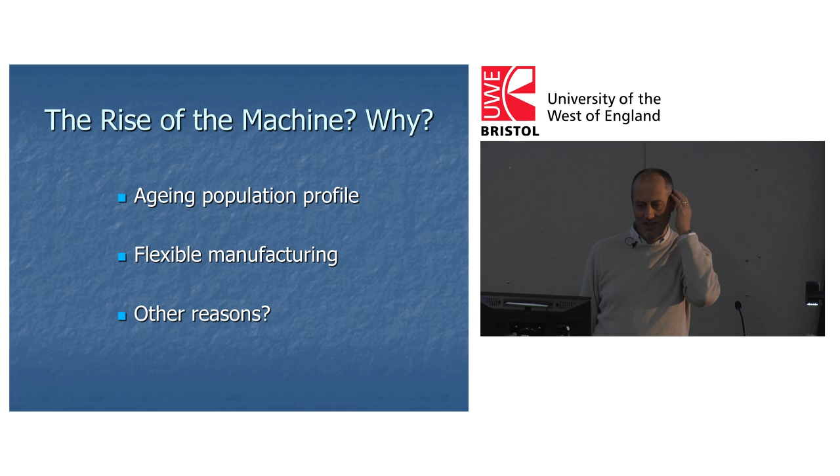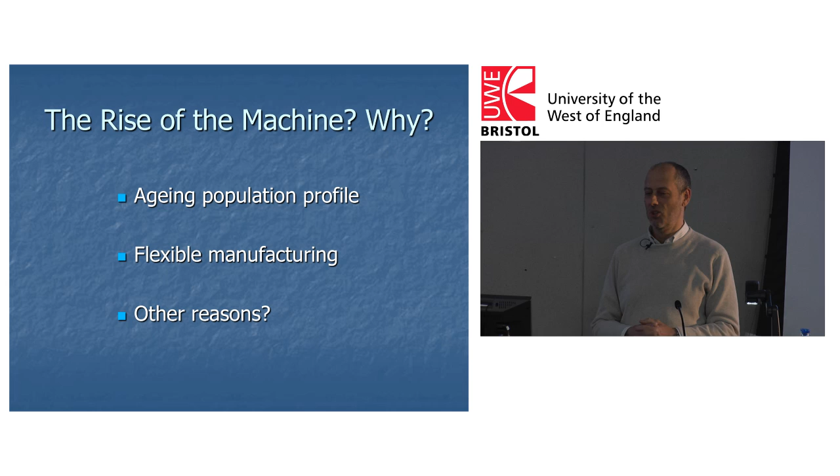I've put other reasons in here, though I'm reluctant to go off into fantasy land, because robotics is one of those areas where there's a kind of fantasy in our heads. There's some fascination coming from somewhere I couldn't exactly define, for us to create something. You could say it comes from monotheistic religions, the idea of creating something in your own image, but I don't want to go there in this talk. There's definitely a fascination with building something - if we can't meet an alien intelligence, we might build one. I'm not a philosopher, but you can see it from the film industry and science fiction books that we have some fascination with this kind of thing.

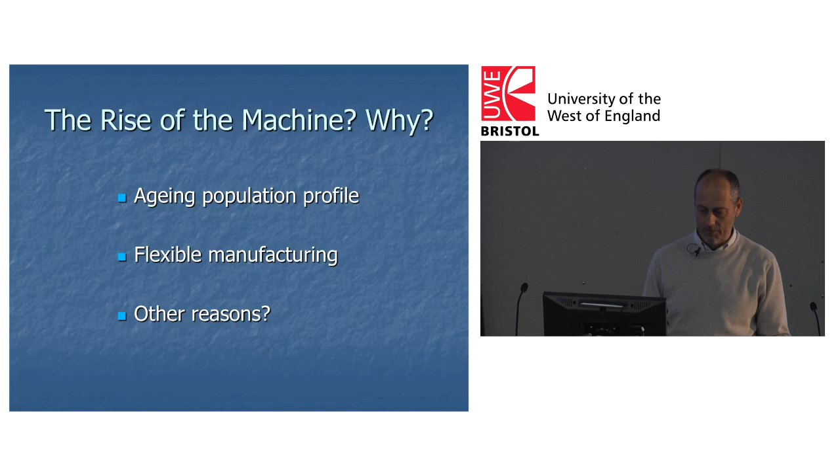What I mostly want to do is romp around talking about the key challenges of what needs to be done to knock down the walls between robots in their manufacturing cells and us, to have them amongst us being useful. There are a whole pile of issues here, and I only have time to mention some of them briefly since this isn't a long talk.

Energy autonomy is number one in so many ways, but we don't have time to talk about it in that depth. Some of these I'll talk about in a bit more detail. Let me just run down through them quickly.

Energy autonomy, I think, is the elephant in the room. If you imagine a robot other than one you can plug into a wall socket, how will it keep going for more than 20 minutes before its batteries or other power source goes flat and runs down? No idea - we haven't answered that question.

We are doing some work in our lab on energy autonomy, trying to create, in some ways, a kind of artificial intestines and guts to consume biomass and produce energy, but I haven't got time to talk about that here - that's another talk. I'll just mention it and carry on.

It's not solved. If you look at the Terminator movies, Arnold Schwarzenegger has not one but two nuclear reactors or something similar in his chest - that's not practical, is it? Could you have an internal combustion engine? I don't think so, not in your home - a two-stroke 50cc engine whirring away isn't going to work. The energy density just isn't there in batteries. It hasn't been, it isn't there, and it isn't going to be there in the foreseeable future. So how are we going to do this? Don't know - let's just leave that one.

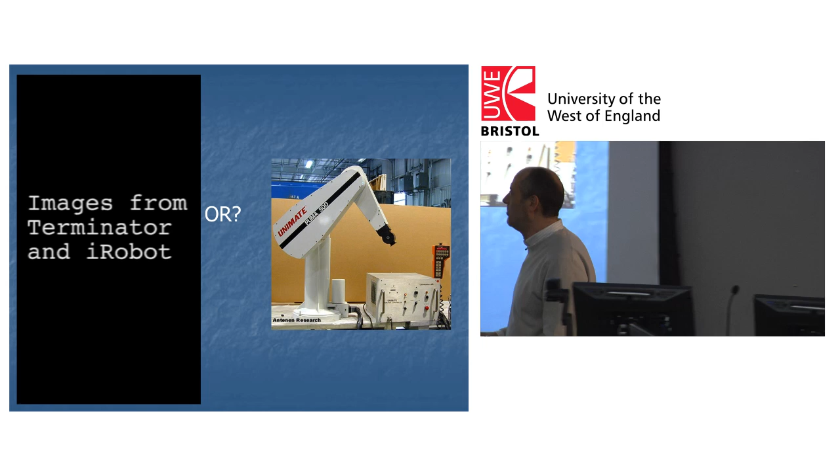Part of it's to do with the media—we almost believe that robots are these things. I know we know they're not, but we kind of have this image in our heads that a robot could be this thing. But we also kind of think, well, really, a robot is this thing.

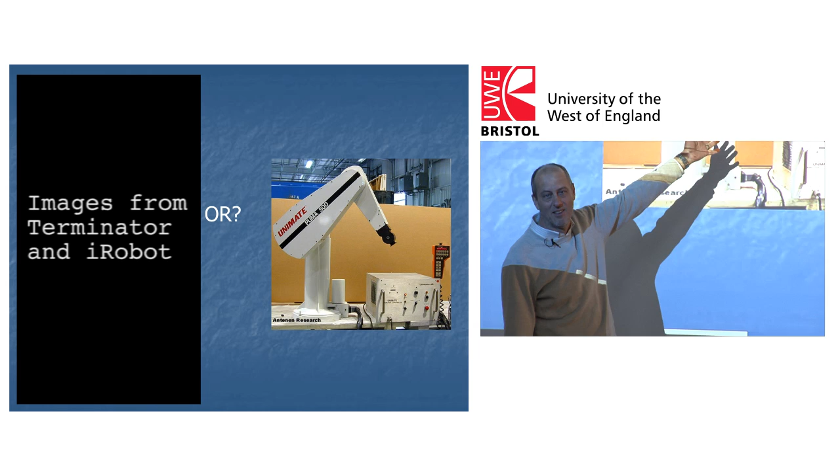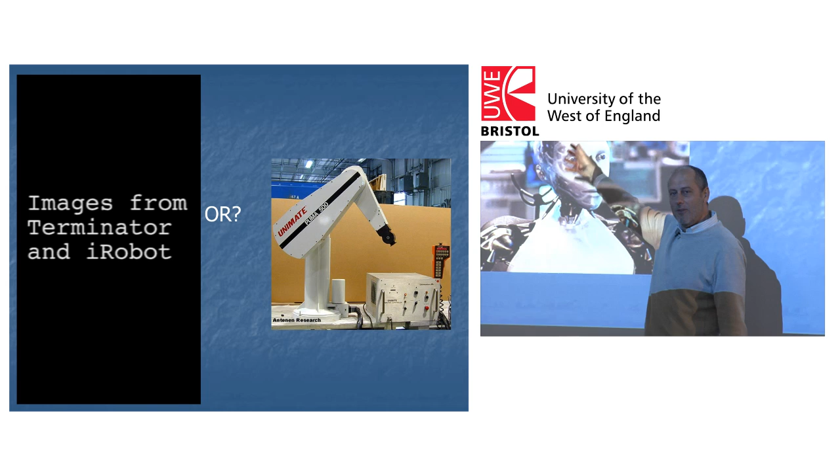This, by the way, some of us will know, is a very old manufacturing robot, one of the first manufacturing robots. So we have this duality in our heads, and it means that when we're doing research trying to actually move from this world into this world, we have to be very careful as robotics researchers about what we really claim we can actually do.

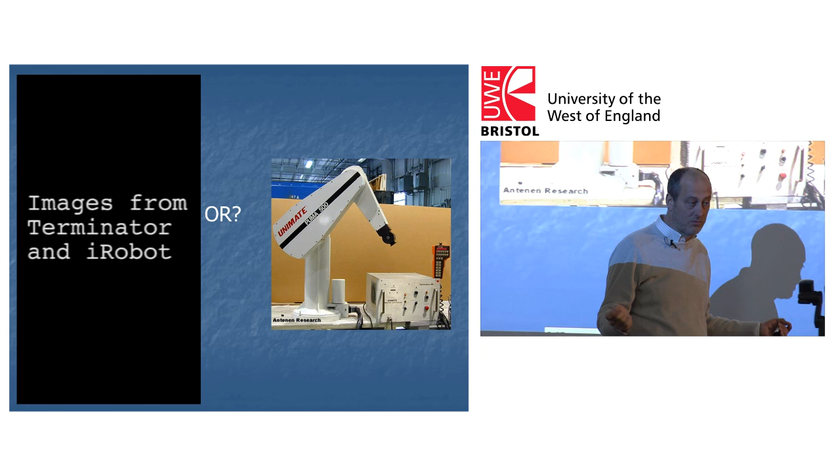It's a very hyped subject, robotics. It gets a lot of media attention, which is good. We had David Willetts, whatever he is currently, around our lab last week.

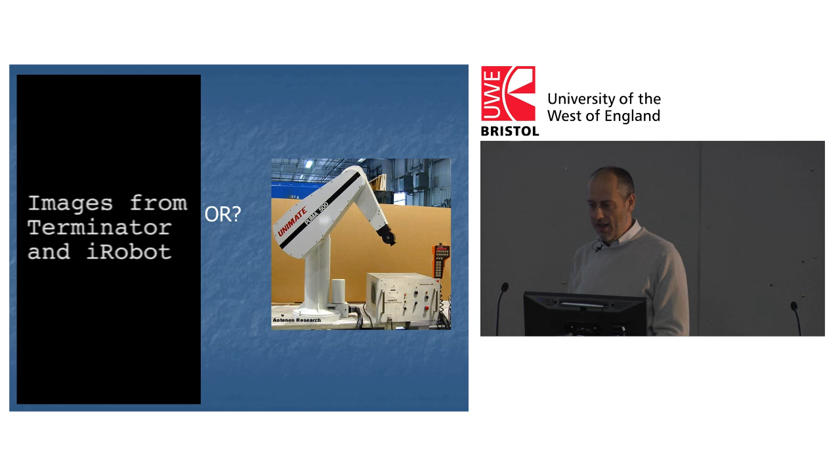One of the ministers, what is he minister of? I can't remember what he's minister of currently. Universities, the universities minister, there we are. So he likes coming there, and he enjoyed it. But I'm sure he would only say mature things about the place. It's clearly a subject where you have to be careful about what you say.

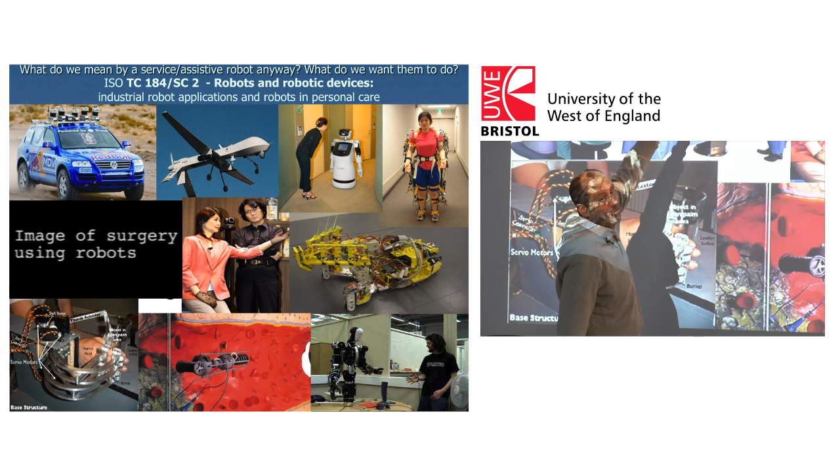What do we mean by a robot anyway? There's all sorts of things. This is clearly a robot, one of the humanoid robots from our lab. There's another robot with whiskers on it, and one meant to show something travelling down a blood vessel - we're just starting research in this area. Is that a robot? Yes, probably. There's a robot surgery machine - is that a robot? Probably. There's a car that can drive itself around - is that a robot? Maybe. So there's no hard rules here. We seem to know intuitively whether something's a robot or not, but we don't really know where the hard boundaries are.

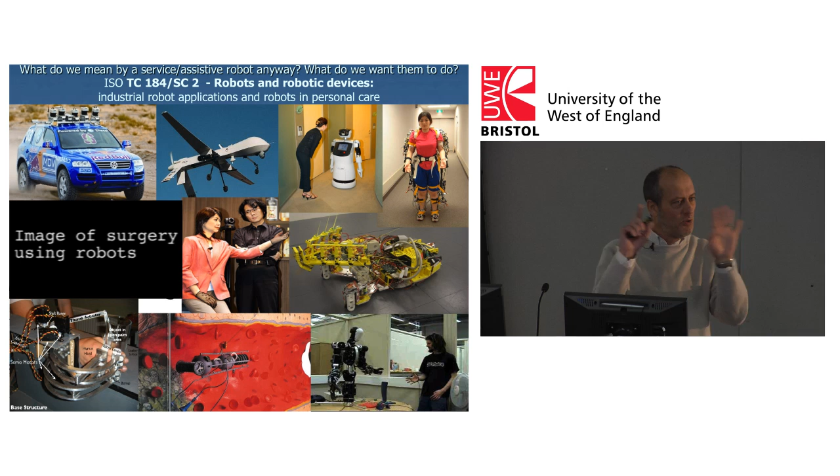What should robots look like, anyway? Well, here's a robot - this is us playing around with robot heads.

Hi, I'm Danny Bozzo, an MSc student in Mechanical Engineering at University of Bristol, doing a thesis at Bristol Robotics Lab. I'd like to show you one of the robots we're working on here, a robot with what we call a hybrid face, one that combines real physical structure with digital 3D animation. Subtle movements and random blinking help add to the realism of the face, and the robot's mouth synchronizes with an incoming audio stream dynamically in real time to control the mouth movements. We're exploring facial expressions as one means of nonverbal communication between humans and robots.

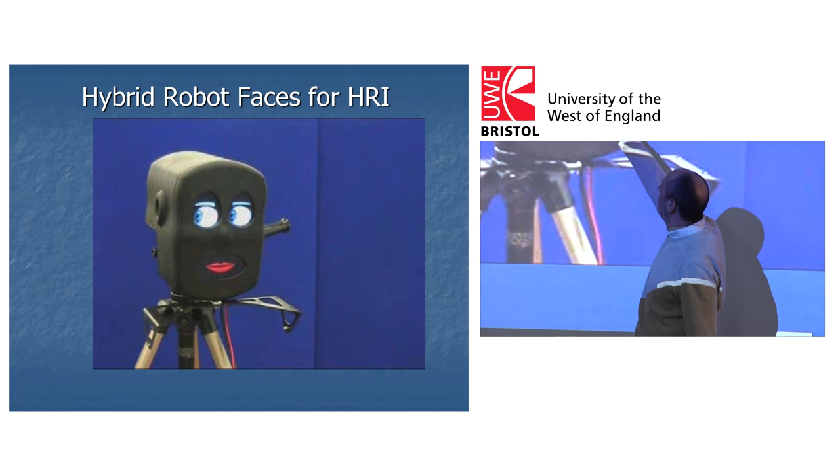And what we've done is link the speech movements of the mouth and the eyes, paying attention to things as they moved around on the screen, so it could make you think it's paying attention and form certain expressions. One thing to note is that this head doesn't really look that much like a human head - that one, however, does.

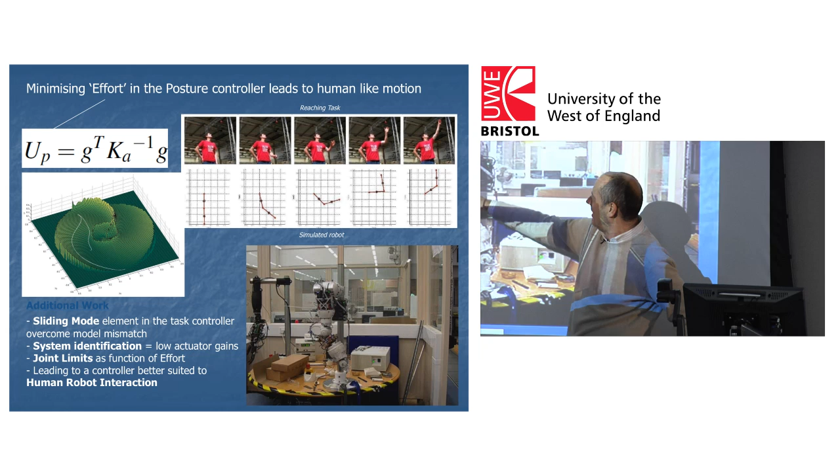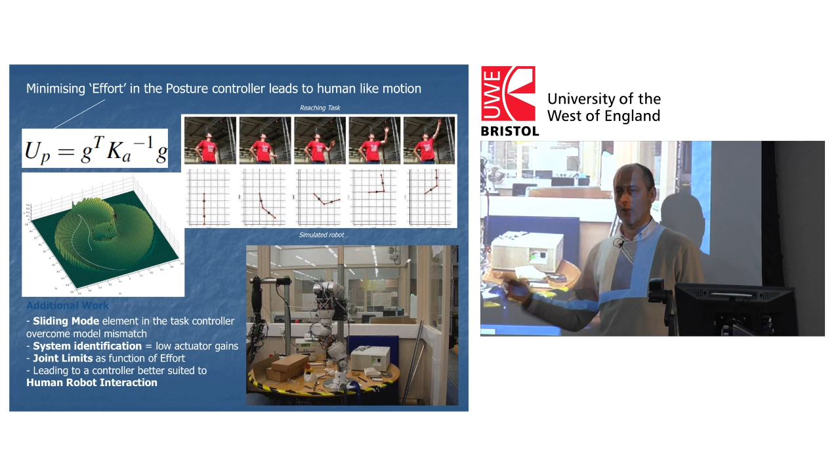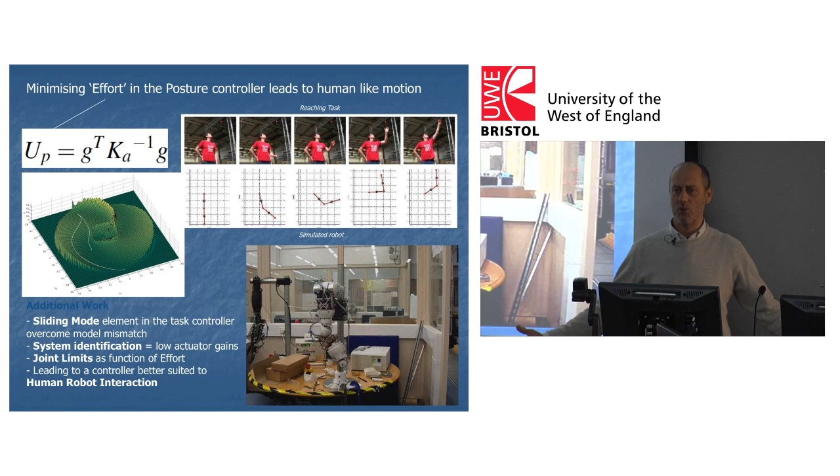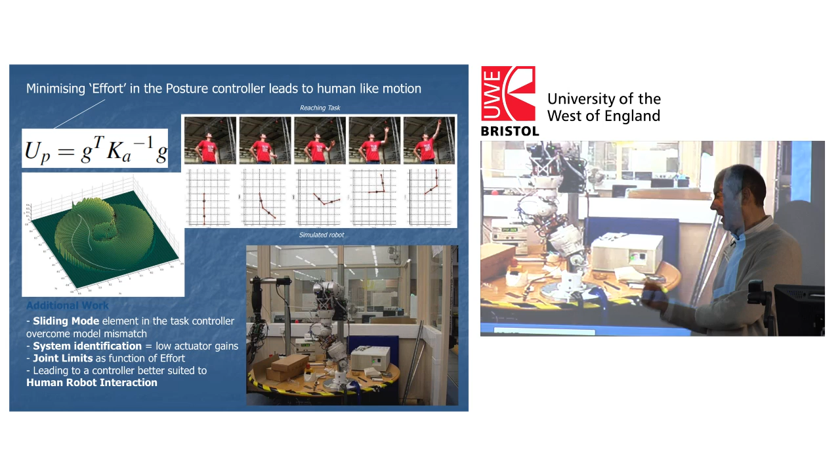What this robot does—this is a robot arm, just this part of a humanoid torso—is we've made it think it has the weight and power distribution of a human arm, even though it doesn't. It's got all the same joints, but the mass is distributed more toward the end. So its version of optimal movement doesn't look humanoid, because most of our own movements are smooth and energy-minimized—that's what we've learned to be like over evolution. We might not like a humanoid-shaped robot that doesn't move the way we move. If this video were working, you'd see that when we reach up, we bring the elbow in, move up, then reach out. Whereas that robot would have to do something different to minimize its energy, which doesn't look very good.

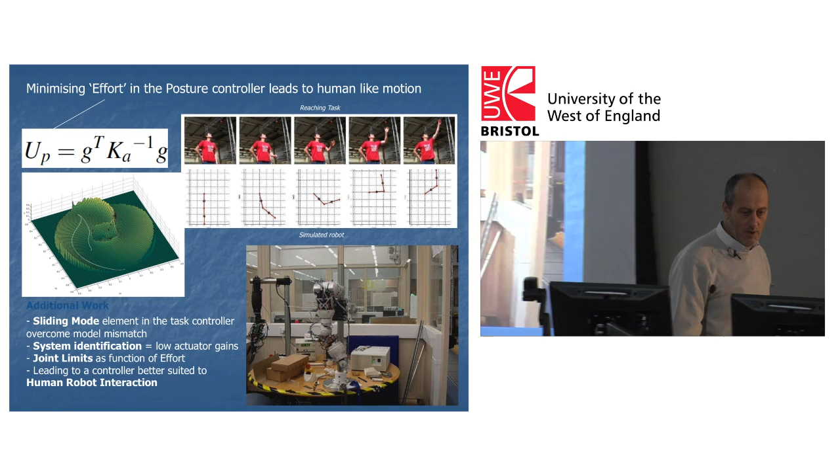The first project I want to tell you about is called Ecobot. It's a small mobile robot that uses special fuel cells with microbes in them that can process things to generate energy. It can process insects and fruit to provide enough power to move around. Normally mobile robots use batteries that need to be recharged so the robot can keep going. The idea of Ecobot is that it can recharge itself.

What we were trying to do there is understand how to make humanoid robot gestures look okay—so you can understand what they are and code them correctly with the speech content. The gestures weren't programmed in the sense of being planned beforehand; they were created spontaneously as the speech content rolled out, which is pretty much how we do it according to neuroscientists. In other words, we think about what we're going to say, and as we say it, the gestures appear. That's how the robot was operating—it wasn't thinking about the gestures beforehand; as the speech unrolled, it would start making the gestures.

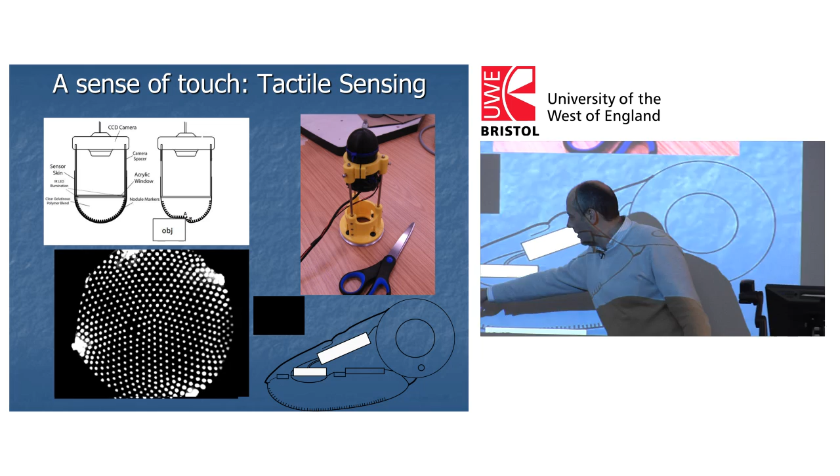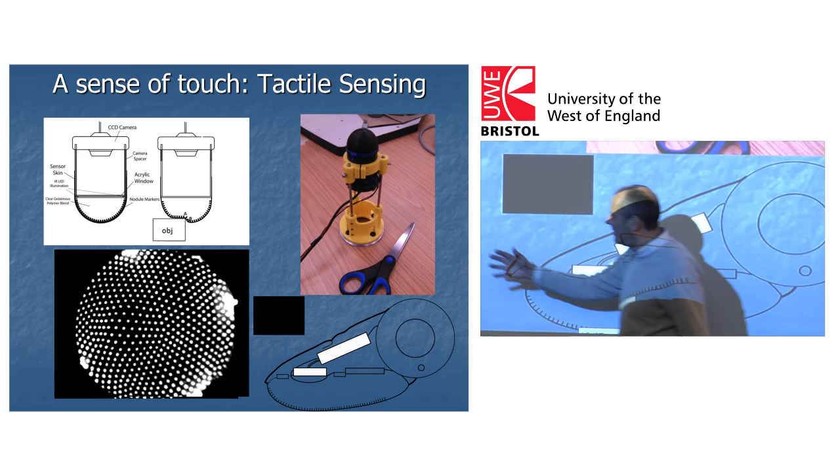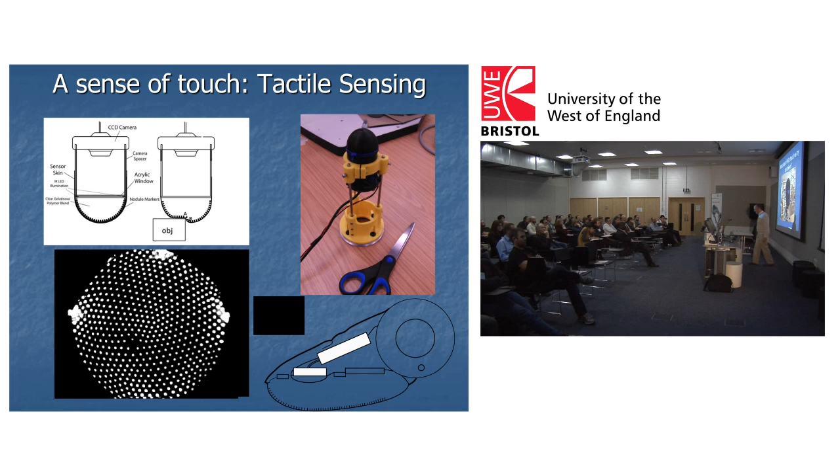This is us making a quite nice, sensitive, fingertip-sized touch sensor, which is optic actually. It looks down at a load of dots painted on the inside, so that as you touch on things, a camera looks down onto there, and as you push things into it, you'd see these dots move around, and you could see therefore that things were happening. Those are about a 1 millimeter pitch, which is closer together than the sensory neurons in my finger, which are about 1.2 millimeter pitch.

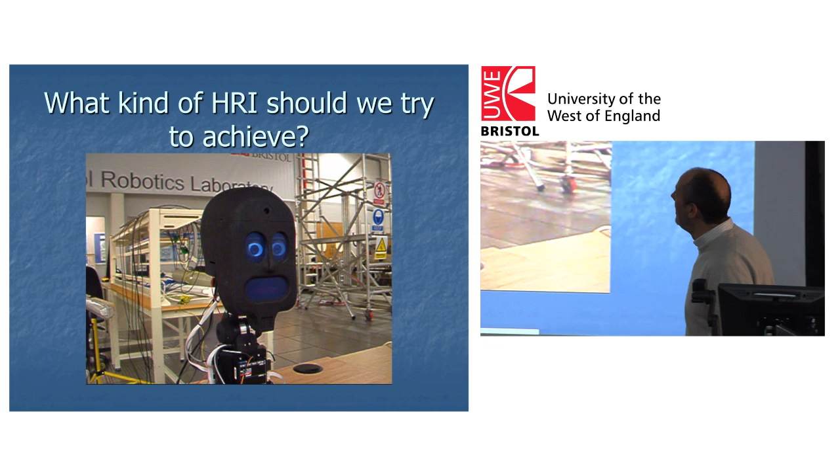Because I think this is a cool experiment, this one was done at Bristol Robotics Laboratory a few years ago, with a real caricature face. The idea here is: what kind of HRI should we even try to achieve? What sort of human-robot interaction should we even try for? Here we were just doing a little play experiment, trying to fool a person into thinking that the robot is understanding what you're talking about, whilst actually not understanding any of it.

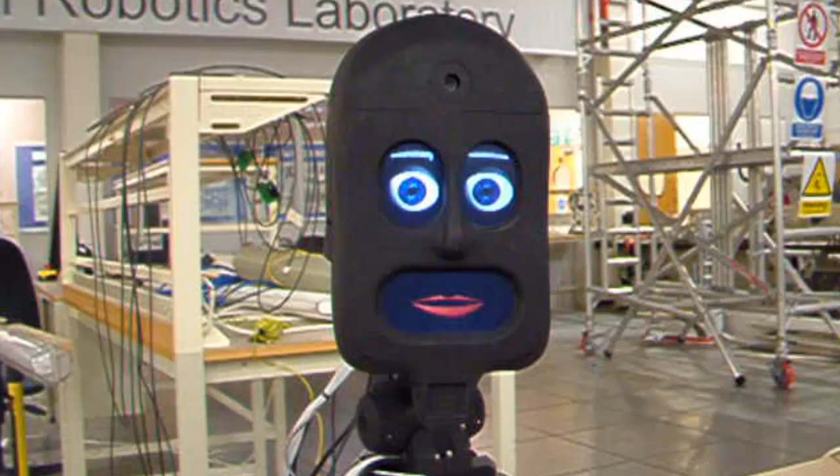You getting this so far? Okay, good. What it does is blink and nod and say 'or' at you, and when someone starts talking to it...

Every single person that we've asked is fooled into thinking that the robot understands at least some part of what the human is saying, and all it's actually doing is making small random movements, and every time there's a pause in the speech content, it says 'or', nods, or blinks or looks around.

It's amazing how strong that is, and I was mentioning that some of us in our homes could have some of this just to pass the time, really. Let's face it, I think some of us have done that kind of thing before when listening to our partners. I've never done that, but I think some people probably have, and it is quite amazingly impressive. It's not understanding a word.

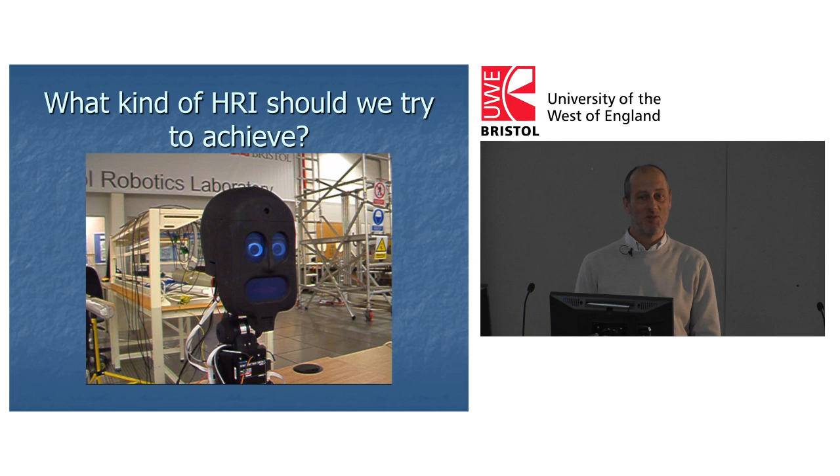So what sort of HRI, how complex does the HRI really need to be? Because this seems to do fine for many situations, not understanding anything.

Let's get on to the safety and usefulness side of things. Whether they should look like this, I don't know. Does a robot need to look like this? I don't know. We've made a fairly close approximation to a humanoid form for the reasons I'd mentioned before, without being too scary.

We wanted this robot to be able to move around at about the same speed as a human can, so when it's gesturing, it can gesture, as you saw with the previous version, the Mark 1 of this. This is a Mark 2 of the same robot. We want it to be able to move around at the same sort of speed a human can. If you want to do that, you end up going up a sort of ratchet of power and mass, such that the thing ends up being about 3 times the mass of a human, and therefore about 3 times the power of a human, in order to move at the same sort of speed that we do.

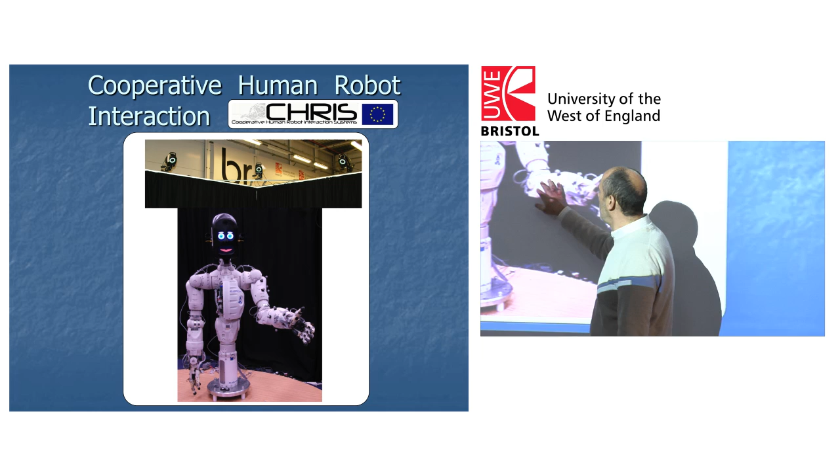So it's pretty dangerous, it's like an Arnold Schwarzenegger. I can imagine Arnold Schwarzenegger is 3 times as powerful as me, easily. So if it thwacked you one, it would be very dangerous - not just because it's made out of hard material, but because it's so powerful. This thing's actually got force control at every joint, and there's a lot of effort into trying to make it safe, so that it knows it's hit something and therefore won't do too much damage.

But it also needs to be physically safe in the way that it'll minimise damage if it hits something. But the more important and harder challenge is to make it behaviourally safe.

Can it understand enough about what you're trying to do together in close proximity to understand what it should do, and therefore what it should not do, so as to do the right thing? For example, if you gave this robot the task of putting these glasses into a box, you would expect to be able to walk around behind it and not have it suddenly flail out from behind and hit you.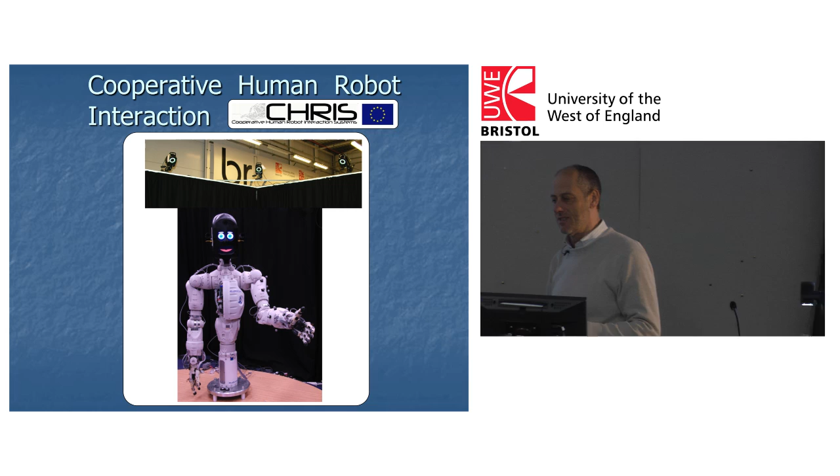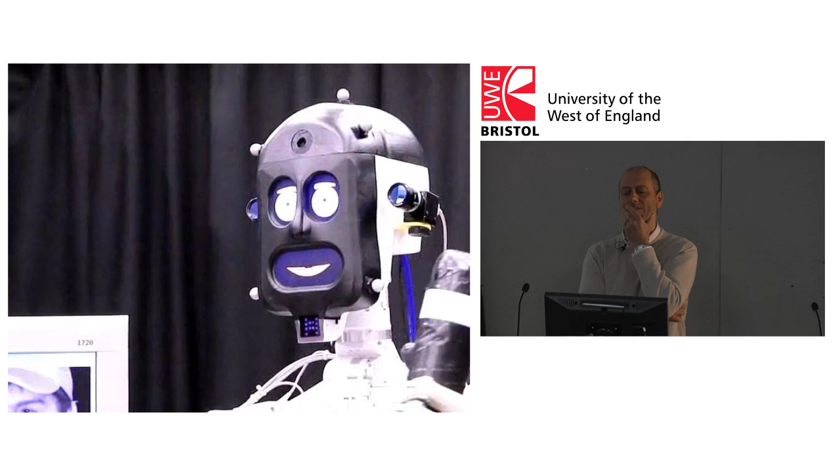That's a kind of context-sensitive safety. This robot is called Bert. Here he is doing some gaze tracking. What you can do is look at the person's eyes and figure out where they're looking. As he's moving this around, these vectors are moving.

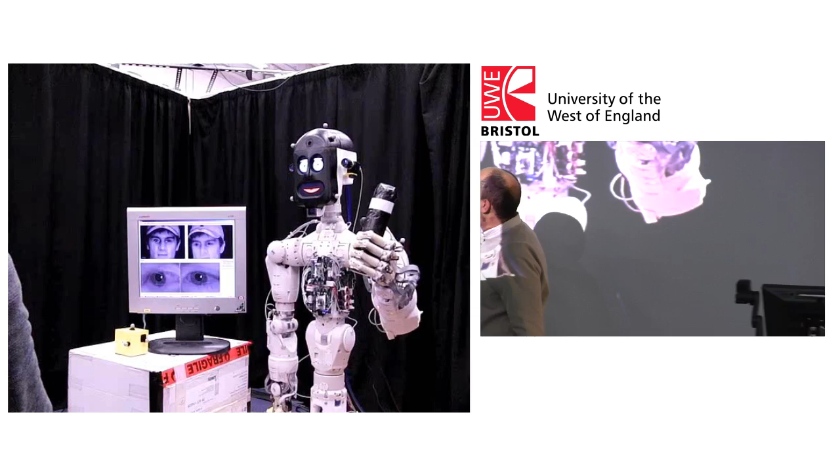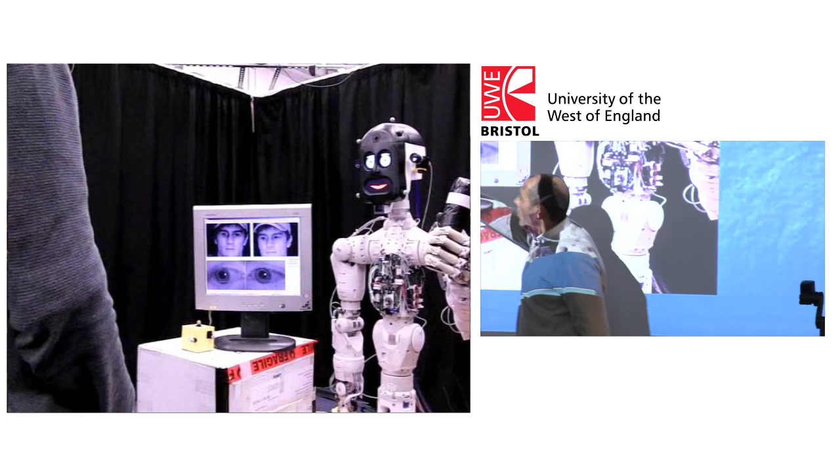There aren't really things sticking out of this person's face, out of their eyes. What he's doing is shining infrared light at the person's eyes, and corneal reflections come back, and depending on where those reflections are, it can figure out where the human is looking. Using these cameras on the side here that do the gaze tracking, this robot can figure out where the person just out of sight is looking.

Shared attention is really important. I'm looking all the time to see if you're paying attention to me because you're looking at me or somewhere in my area. We find it's a very important message, shared attention.

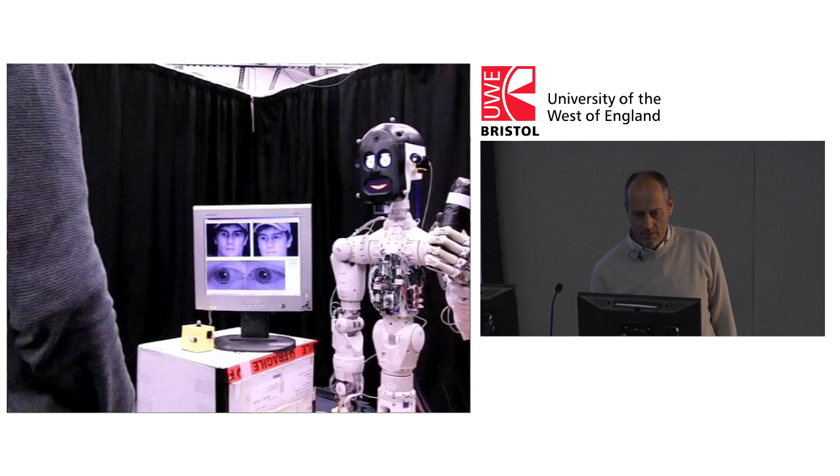He can also move his own eyes around so as to track something. In a minute, I think the human's going to walk past.

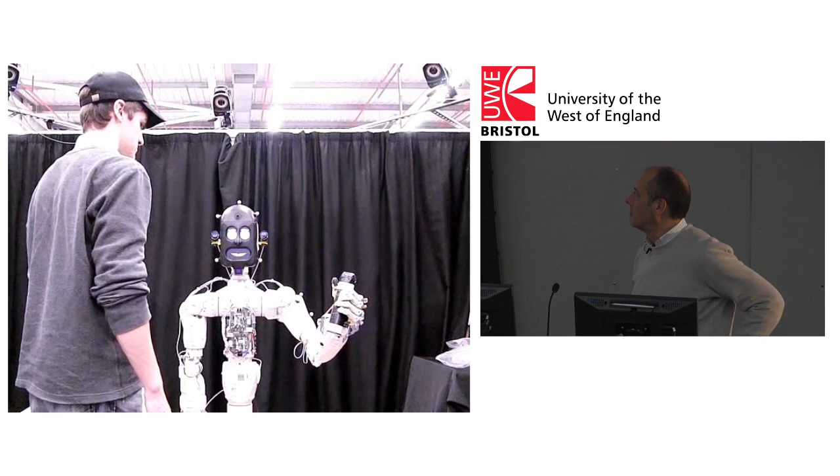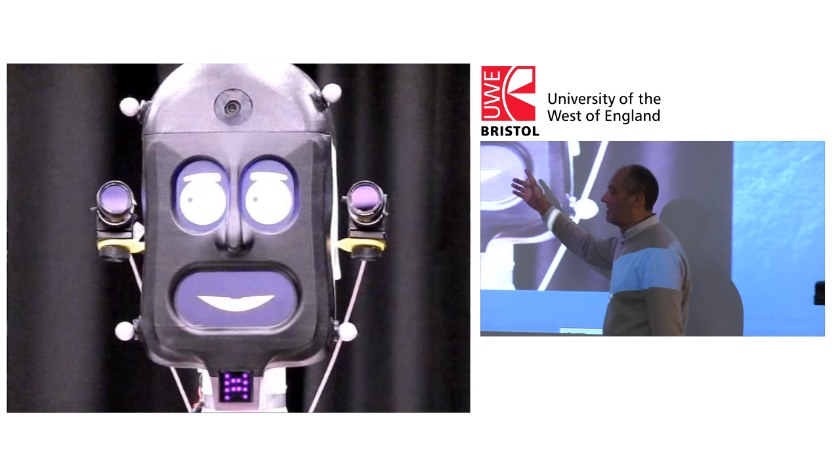This seems trivial, but it turns out to be rather important. One of the things this robot is not doing, which we only learned by doing this is more important than we realized, is it's not blinking.

Blinking, or the lack of it, is a really strong subliminal message to us of death. If you think about films and TV programs where you finally decide the actor playing the person is dead, part of it is that their bodies aren't moving, but also they stop blinking. We didn't realize why this looked spooky to people until we realized it's because it wasn't blinking. These seem like trivial things, but they're actually rather important.

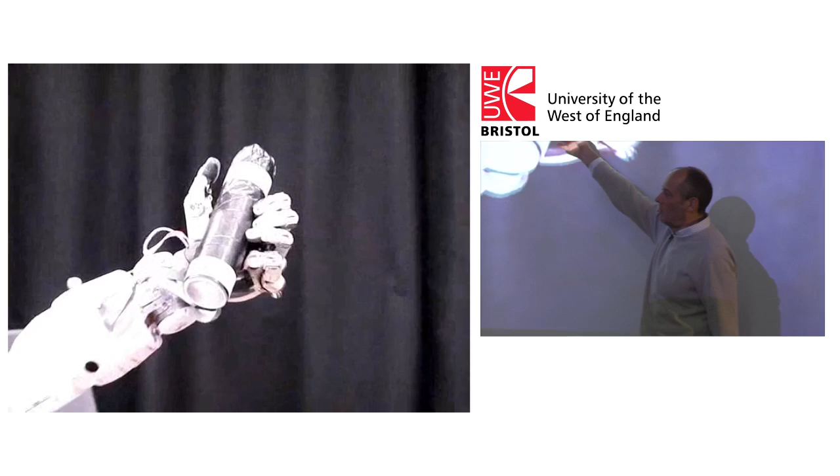Here's a robot trying to pass an object to somebody. As it passes it, it's looking for visual attention from the human all the time, to see if the human is actually watching the operation. He's checking if the human is looking at the object, and he won't let go unless the person is, A, looking at the object, and B, starts to pull on it.

So we'll move on, I think, otherwise we're going to take too long. This next one is to do with verbal communication.

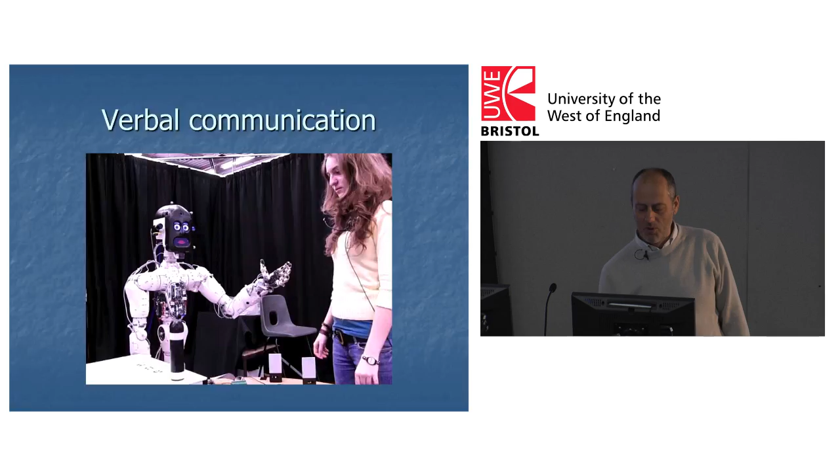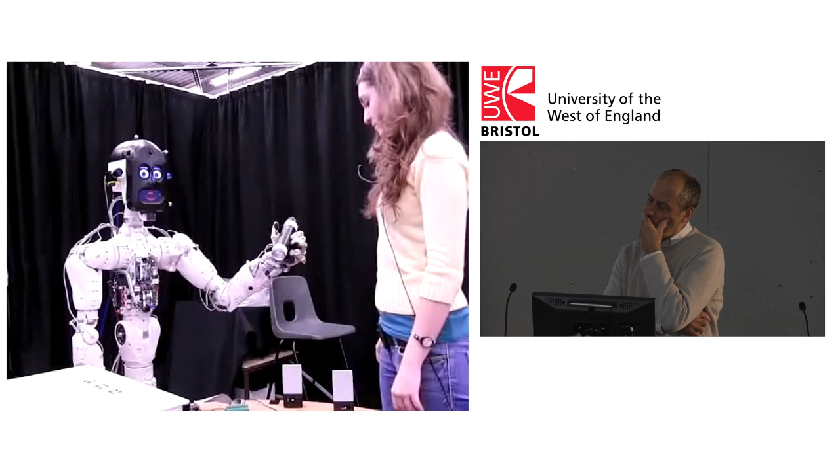Going to prepare ring. What would you like me to do? Grab. That was grab, I think you said. What would you like me to do? Show. Showing you the ring. What would you like me to do? Give. Going to serve the drink. I'm going to serve the drink because it thinks it's got a drink in its hand. Hand over. What would you like me to do?

One point I want to make is we've got a very long way to go in terms of social interaction, haven't we? You'd be pretty bored pretty quickly talking to that robot, wouldn't you? And you'd probably want to kick it, actually. Perhaps the Korean guy had the right idea.

We need to be able to teach robots easily, as I mentioned earlier, because it's no good having to pre-program them. We don't want to have to do that. This is another robot, called iCub. It's an Italian robot.

This guy here is from the Italian Institute of Technology, who are close collaborators of ours, and they created this iCub. It's a sort of humanoid robot on the scale of about a 7-year-old. I'm not sure why they wanted to make it a 7-year-old, possibly because it wouldn't look too scary. But what's going on here is that the iCub is going to learn about objects.

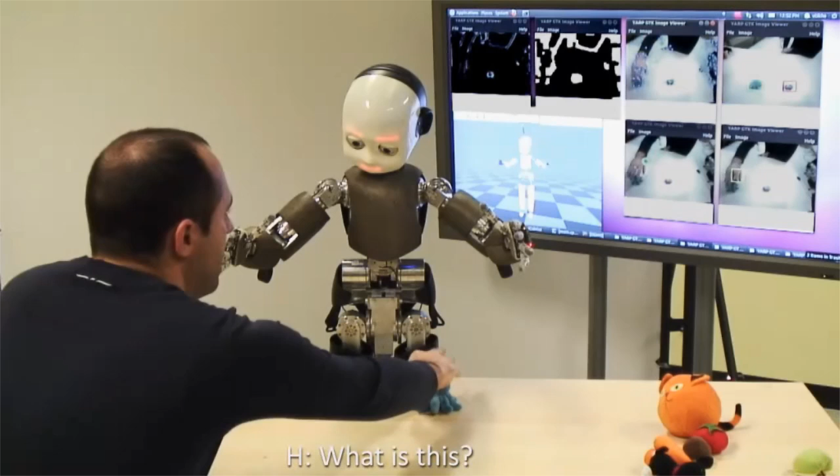So it's quite amusing. Not sure how loud it is. That's right.

I do not know this object. What is it? This is an octopus. Who do I see? What should I do? Where is the purple car? What should I do? Where is the purple car? I have not found any purple car. Is it so? No, here it is. Who do I see? What should I do? Where is the purple car?

I think this is the purple car.

Pretty complicated concept though, wasn't it?

Am I right? Yes, you are. Cool. What should I do? Push the octopus. Okay, I will push the octopus.

Well, I mean, this is where it's at. This is the state of the art. There's some quite complicated stuff going on there.

Although this robot, iCub, had already been told about the octopus, he hadn't been told about the purple car. So that was learning the fact that a purple car has these visual characteristics. In fact, you can then build the fact that the robot knows about objects that have certain characteristics, and build sequences of what to do with them. I'll show you the next slide because I think this is also quite funny.

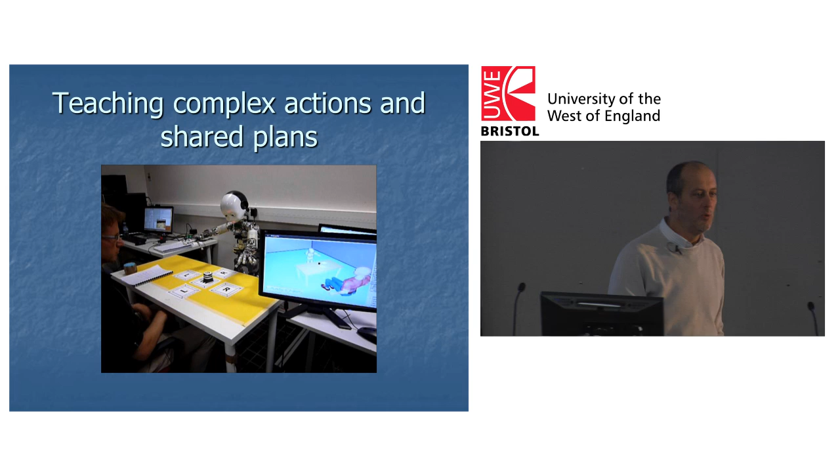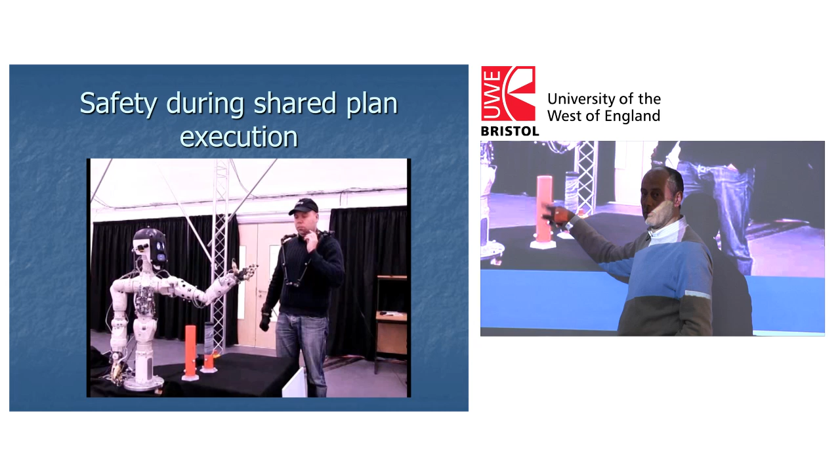We find it effortless. Just because I've gone a bit too long, I'll flip through other things. In this video, we look at the fact that Sergey, the experimenter, looks away in the middle of Bert trying to give him this table leg. That's a table leg, by the way. There's a tabletop somewhere, and the task being executed here was putting these table legs onto the tabletop to basically make a model of an IKEA tabletop assembly operation.

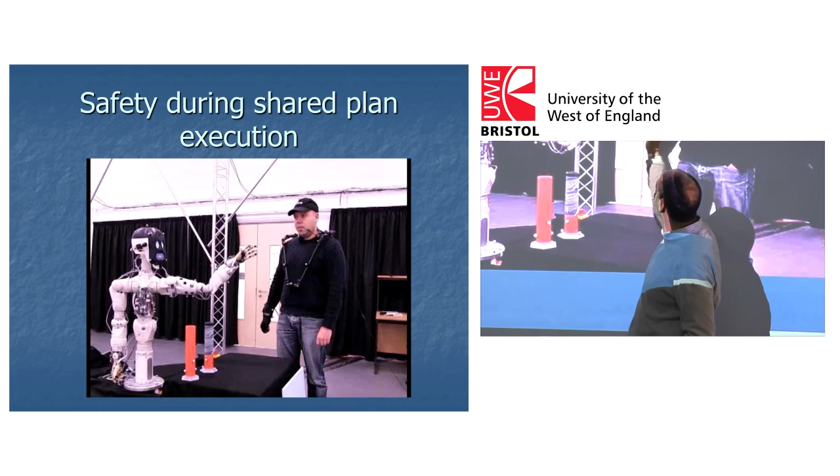Halfway through giving this leg to Sergey, he suddenly looks away. So the gaze tracking software says, 'Oh, hold on a minute, I better stop here. I can't. Well, I need some advice. What do I do now?'

In fact, this project looked at both physical safety and behavioural safety, but also how to form shared plans. So there's some idea that we're going to build this table together, and these are the bits of the task that I need to do as the robot. These are the bits that the human needs to do as the human, and together we'll achieve some overall task, which in this case is to put those two legs and another two legs you can't see in that picture onto the top of the tabletop, so as to make the table.

What's quite hard there is the idea that something we handle very easily - the idea that although you've agreed a plan, let's say the plan is that the human will hold the tabletop and ask for the table legs from the robot, and as the table legs are given to the human, they'll put them onto the table. That's the shared part of the task which builds the table.

If the human then suddenly, in the middle of all that, even though he is supposed to be holding the tabletop and being given the table legs, reaches out and tries to get one of the table legs himself, we would take that effortlessly in our stride. But a robot thinks, 'Oh no, what do I do now? The shared plan is broken. How do I proceed?' And at the moment, Bert gets very upset actually, and he thinks, 'Oh no!'

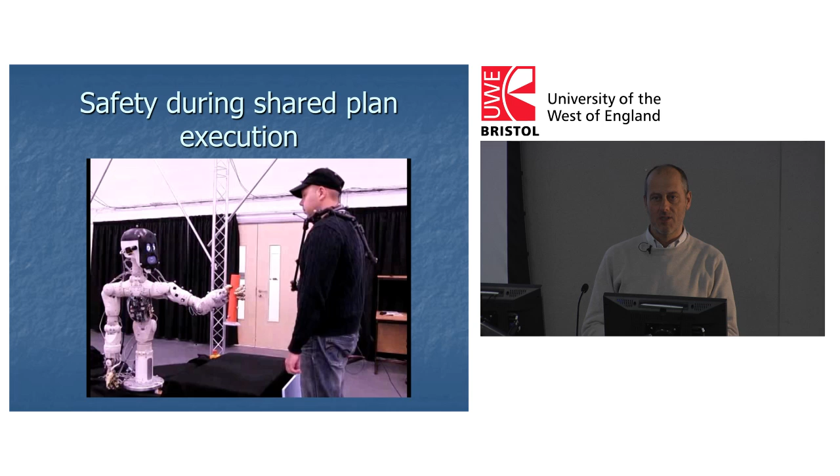This is all stuff that we take effortlessly in our stride, but we're struggling with all this stuff right now, and that is the state of the art. Anyway, lots to be done.

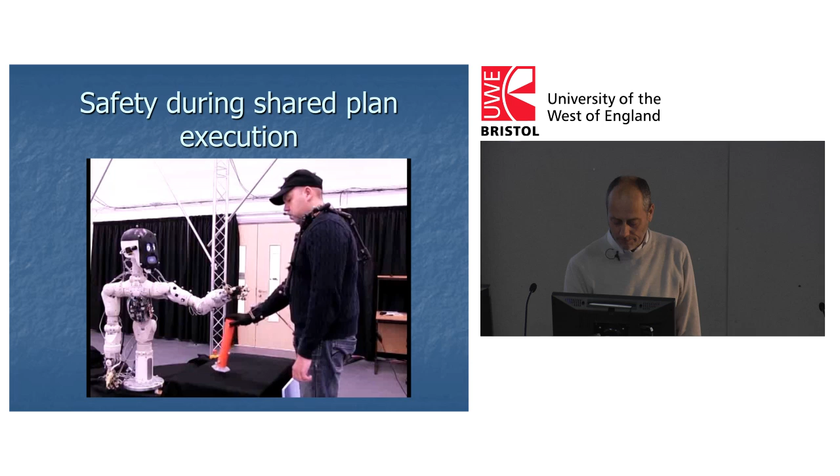In its most extreme case, it could be this: in the very wealthy nations - and we don't think we are one of the wealthy nations - I'm just paraphrasing here, okay, it's not necessarily what I believe, although it might be. What's the real cost of a war? It's the body bags coming back to your own country. If you think that is the real cost of war, i.e. your own people coming back dead in body bags, then if you had robots on your side and didn't have any people there, you could go and kill as many people as you liked.

I don't know if that's true or not. Well, I have my own opinion, but I'm not going to express it now. That's an ethical issue - what should we do about that?

Another more close to home ethical issue is, should we even really be using some artificial device that is looking after a little old lady or little old man, like me when I'm old in a year or two from now? It won't just be helping to make a cup of tea or helping them to wash and doing other things - it may well be replacing some human companionship, and is that right? Don't know, maybe not - it's certainly difficult to think about. And then on the other side, there's more like the Korean thing I was talking about earlier.